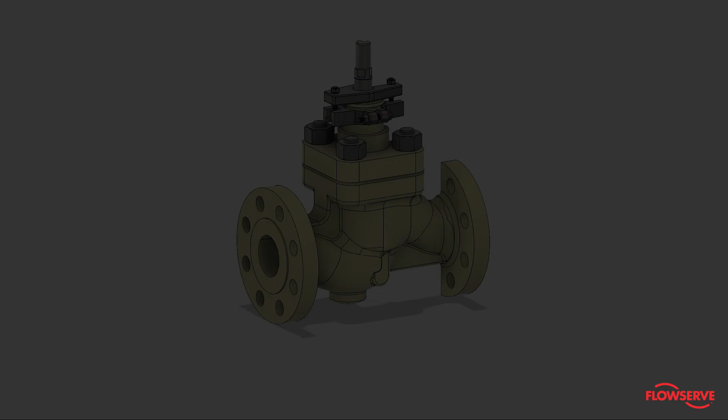Flowserve offers packing in many different types, styles, and materials for a wide range of applications. One thing they all have in common is that they require periodic adjustment to ensure optimal performance.

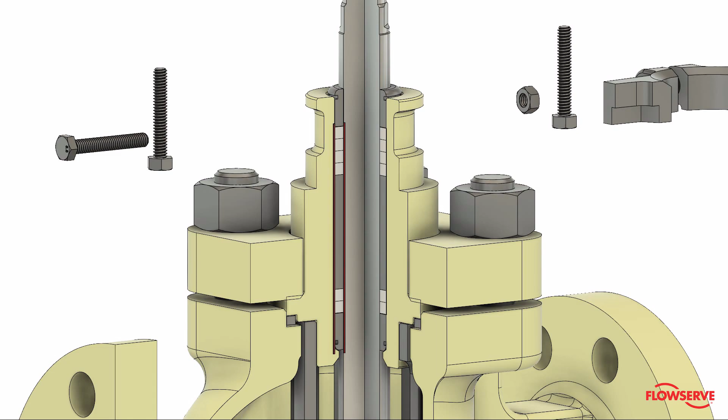Adjusting packing is a necessary and important valve maintenance practice. Neglecting packing can lead to a leak path formation that may be impossible to repair without packing replacement. Packing leaks should be addressed as soon as possible to ensure safety and optimal reliability.

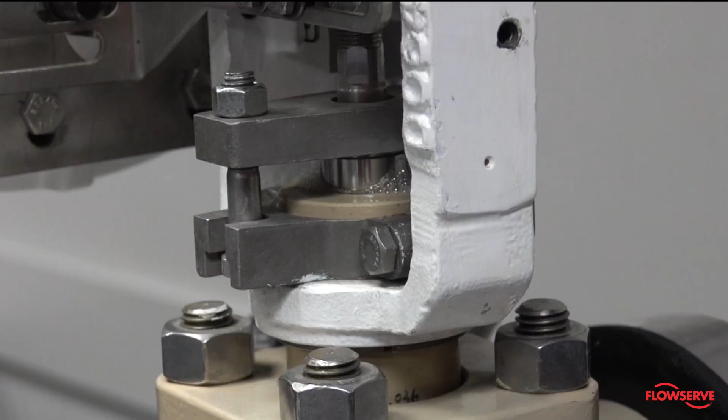For this example, we will be eliminating a leak on a Mark I control valve with standard V-Ring PTFE packing.

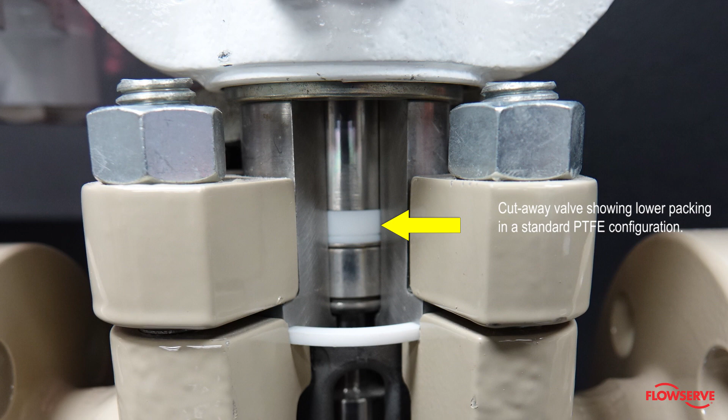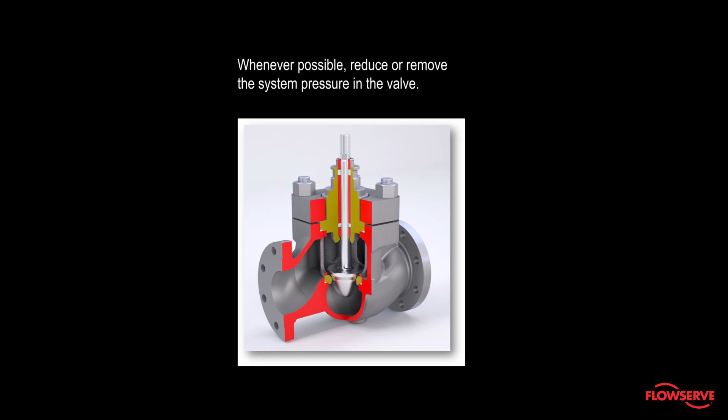Whenever adjusting packing, there is a risk of potential pressure release, whether the valve is pressurized or not. Whenever possible, reduce or remove the system pressure in the valve. When removing system pressure is not practical, it is critical to follow proper safety protocols as outlined by your organization.

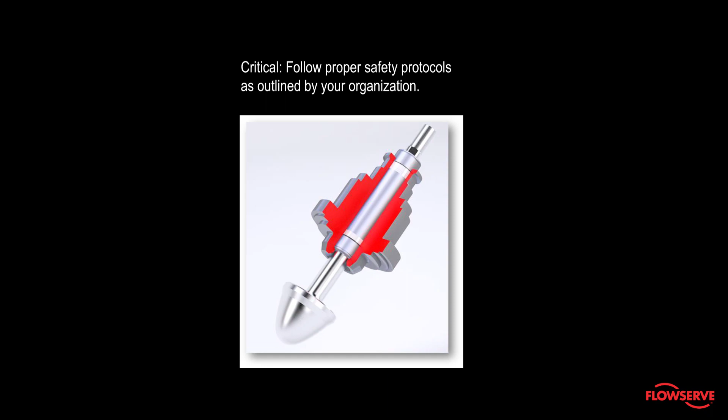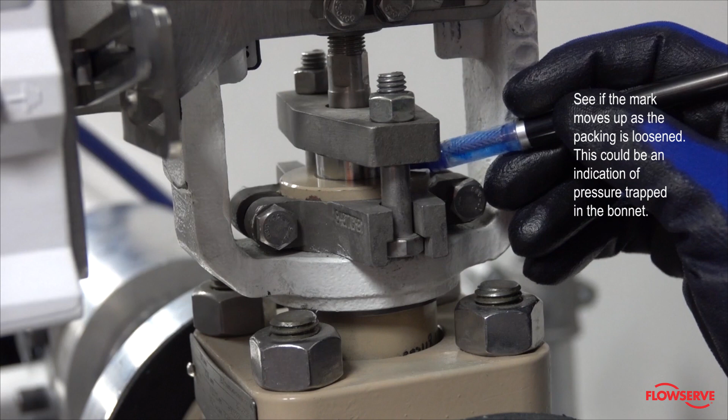It is recommended to mark and observe the upper guide or packing follower to see if it moves up as the packing nuts are loosened, as this could be an indication of pressure trapped in or around the packing.

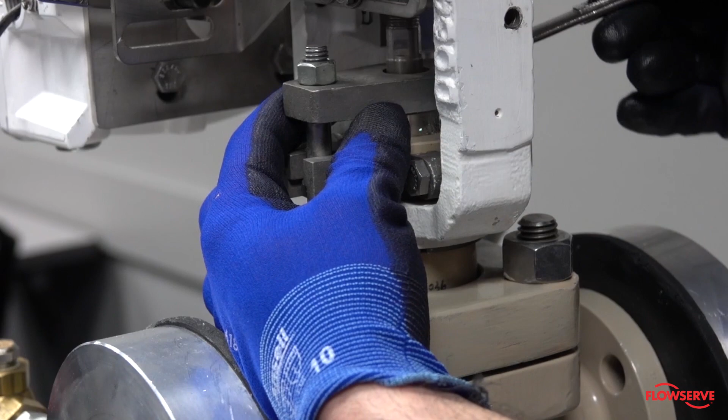To tighten the packing, carefully and equally adjust the nuts no more than 1/4 turn or 1 nut flat at a time in an alternating manner, while keeping the stem centered in the gland flange.

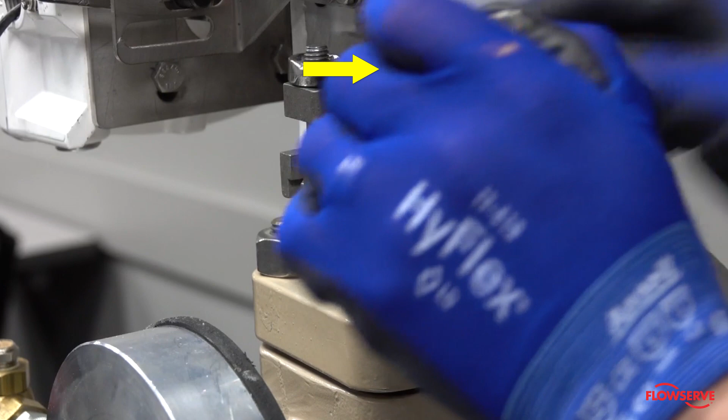Tighten conservatively, or just enough to stop the leak without over-tightening. An over-tightened condition can result in slower, jerky plug stem movements and premature packing wear.

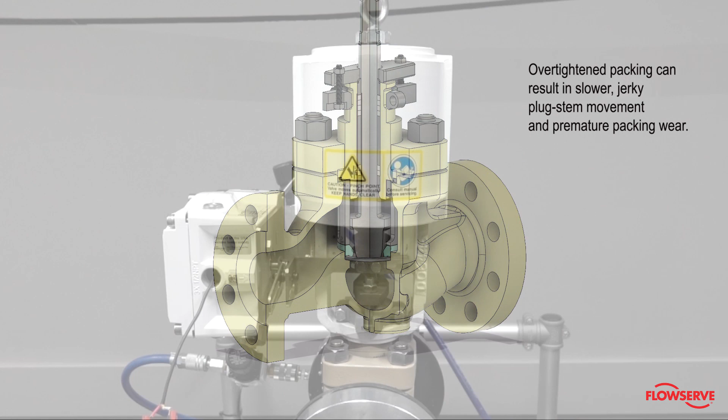If the valve has been bypassed, stroke the valve 10 times. If the valve has not been bypassed, allow it to go through its normal operating cycle at least 5 times. It may be necessary to repeat the tightening process once the valve has cycled through normal operation.

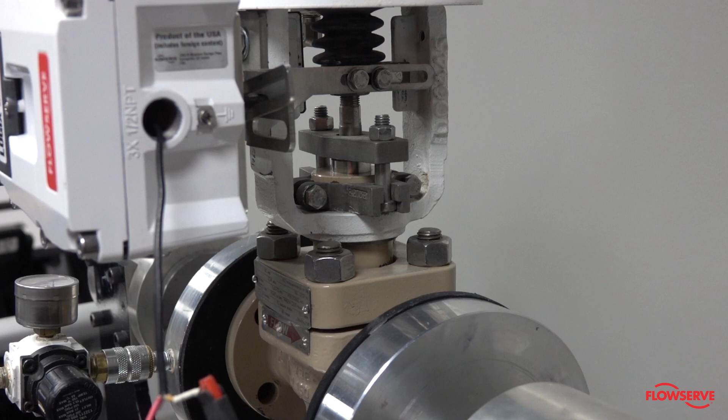After stroking the valve or allowing it to cycle through normal operation, reintroduce the system pressure and ensure that the valve is in a partially opened position. Inspect the area to confirm the leak has been reduced or eliminated.

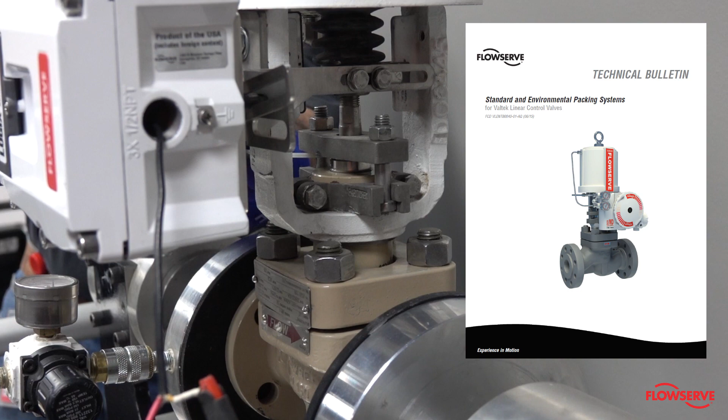If the leak is still present, refer to the Standard and Environmental Packing Systems IOM instructions for details on recommended steps and torque values for specific packing configurations.

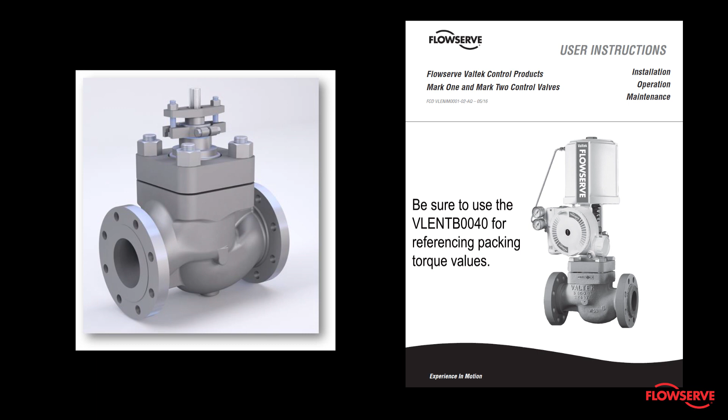The instructions for tightening packing are included in the IOM and are designed for new packing installations. The torque values are also often valid for mitigating leaks in packing that has already been in service.

The torque value ranges outlined in the IOM are good recommendations, but in some cases they may be slightly less than the required torque to eliminate the leak.

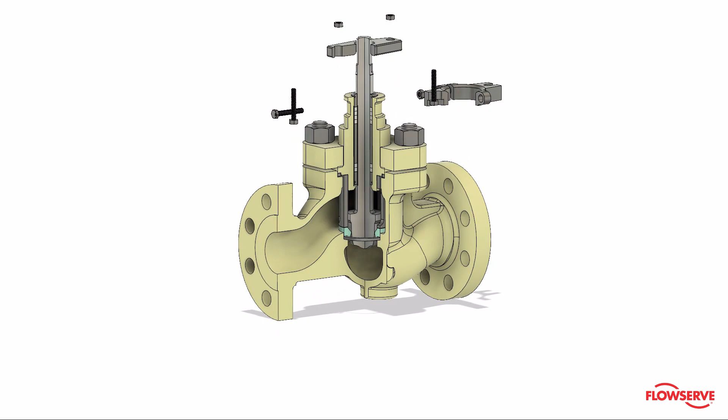Exceeding the recommended torque may be necessary, but keep in mind that the torque value should be as low as possible in order to minimize friction, jerky movement, and premature packing wear.

For packing styles not listed in the IOM, please contact your sales representative or the factory for recommended torque values.